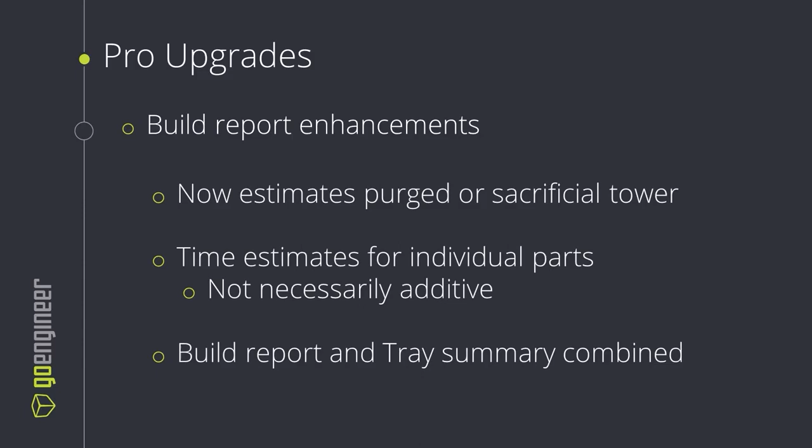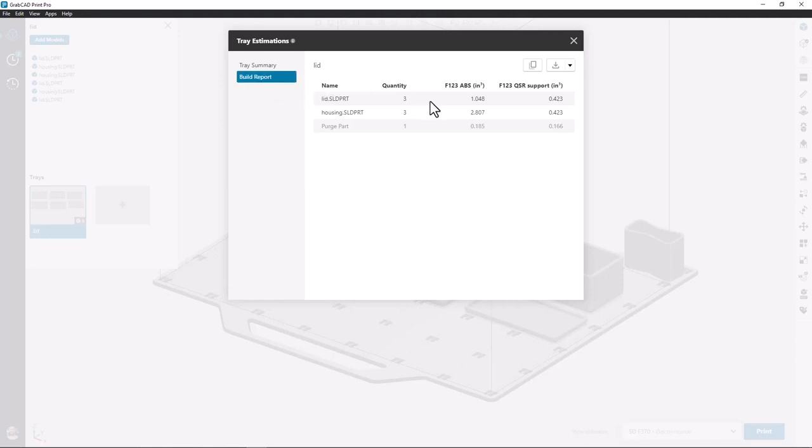Here in the software, we have a simple FDM F370 tray loaded up with 6 parts. If we click our View Estimates button, we'll be taken to our tray summary where we see total support and material usage. Jumping over to the Build Report section, we'll see a breakdown by part, and now including the purge part as well. We can export all of this information to an Excel spreadsheet.

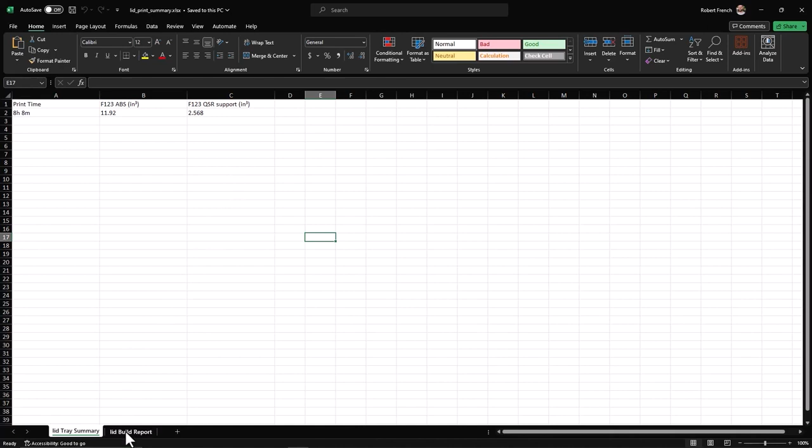When we jump over to the Excel spreadsheet, we're now seeing 2 tabs: Tray Summary, which is the total usage of material and support, and also our Build Report, which gives us a breakdown by part, and now also includes that very valuable print time. Here's the updates that everyone gets in this month's version of GrabCAD Print.

There's a new measure tool, which works with points and planes. We can rename parts, assemblies, and bodies inside of the project panel. We have new selection options, including Select All, and the ability to invert our current selection.

We also have specific improvements to machines. For H350, we can now colorize our parts in a nest. Sometimes it's hard to discern different parts inside of a tightly packed nest, but now we can colorize the parts to see them more easily.

We also have layer line visualization, where we can quickly identify problem areas, problem surfaces that might have awkward layer lines during a print. Lastly, a really cool enhancement: Origin One is now fully integrated into GrabCAD Print.

We no longer have to use different software to generate support—we can do all of it inside of GrabCAD Print. Really cool, slowly seeing Stratasys integrate all of its technologies into one software platform.

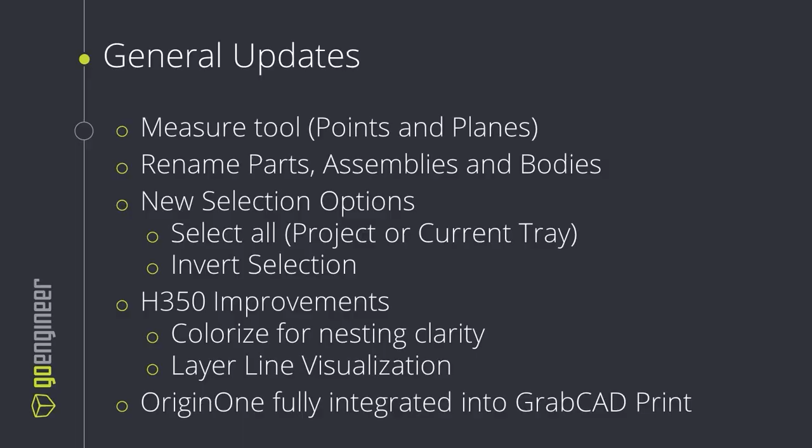Measure can be found on the right-hand side of the screen with all of our other tools. We can do point-to-point, plane-to-point, or point-to-plane. This can help us understand spacing between different bodies, or perhaps confirm that an STL is using the correct units.

In our project panel, we can now rename our parts. This goes very well with the new ability to label parts, as labels can automatically draw upon the part, assembly, or body name. With different selection options, we can really speed up our workflow.

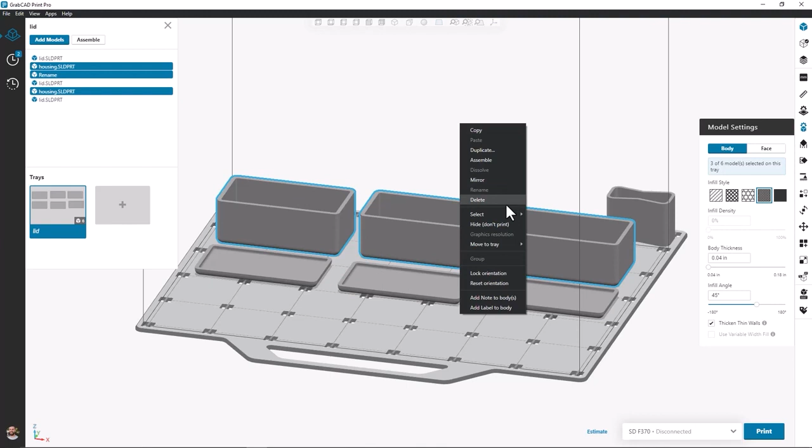We can simply select all parts on a tray. Or, if I wanted to set a certain infill style for these housings, I could do so: right-click, and now invert my selection, grabbing all the lids and setting a different infill style.

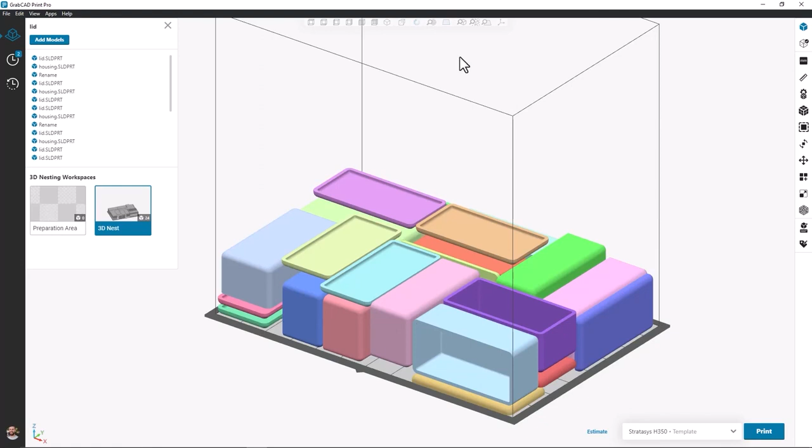The H350 enhancements are found at the top of the screen in what is called the View Control strip. We can turn on colorization, and you can see how it really clarifies different parts and bodies on the build tray. We can also use layer line visualization, which helps us identify problem areas that might not give us the greatest quality during an actual print.

We also had the P3 enhancements for full integration into GrabCAD Print. That warrants its own video, which we are going to create at some point in the future.